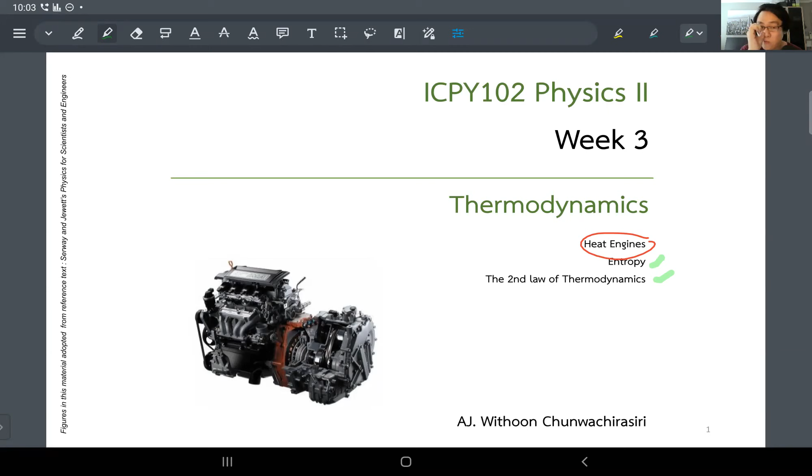So this time we are going to focus on heat engines. One thing you should know is this is pretty much going to wrap up the story, like it's cooling it down. Well, not yet—next time it's going to be cooling down—but this time it's the peak of the thermodynamics material, because we're going to take everything and put it into the story of understanding how a heat engine works. Sounds cool? All right, so this is it.

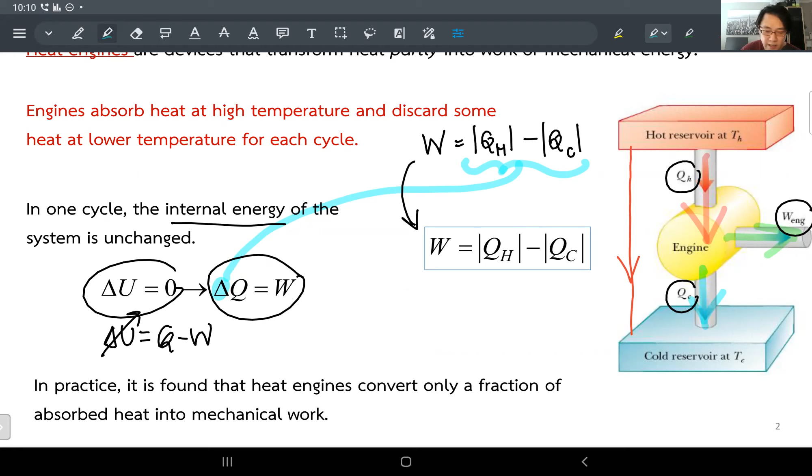So this delta means this difference right here - that's the delta. It means there's a portion of heat that flows in, and you have to take the difference with respect to the heat that is flowing out. So the difference between the heat coming in and going out must be equal to the work done. That's it. It's kind of long, even though this slide looks simple enough, but I hope this gives you the infrastructure of everything we're going to use.

Okay, but this is going to get more complex over time when we attach this whole thing with the real process, like a PV diagram, for example. All right, cool. So how can we express the ability for this machine to turn incoming heat into some useful work?

So we define, I think this is the word you guys agree on, efficiency. So what you want to know is how efficient this engine is running. The better the efficiency, the better it can take heat flowing in and turn it into useful work. And the best possible case, a perfect efficiency, would be a 100% efficient engine, even though we said that's not the case. So what should be the definition of efficiency, guys?

The concept is very simple: what you get divided by what you have to supply or provide to the system. Does that make sense? Think of it like studying physics right now. The efficiency of your learning is how much material you can put into your head, divided by how much material I provide to you. Or you can think in terms of time: you study for 1 hour, how many minutes do you actually concentrate and understand the material. So the concept is simple - what you get over what you have to supply or provide to the system.

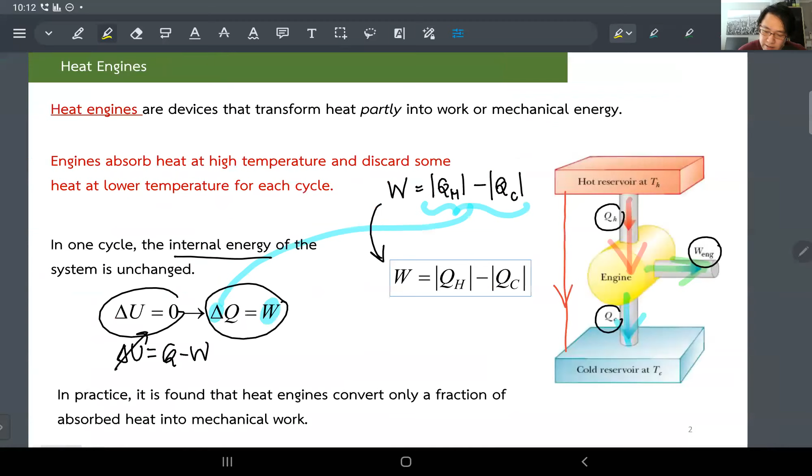Looks good. And what you get, of course, is the work done from this system. And what you have to provide, of course, is Q hot, the incoming heat. So by definition, the efficiency is defined as the work done over Q hot.

And because efficiency is just a number, it's never going to go negative, so that's why there are absolute value signs everywhere - all you care about is the number. And that number is going to go between 0 and 1. 0 means you get nothing out of it, 1 means you get everything out of it. You can multiply this by a percent, so you can go from 0% to 100%, depending on the units you want to work with. But efficiency is just a unitless quantity, no unit - it's just a number.

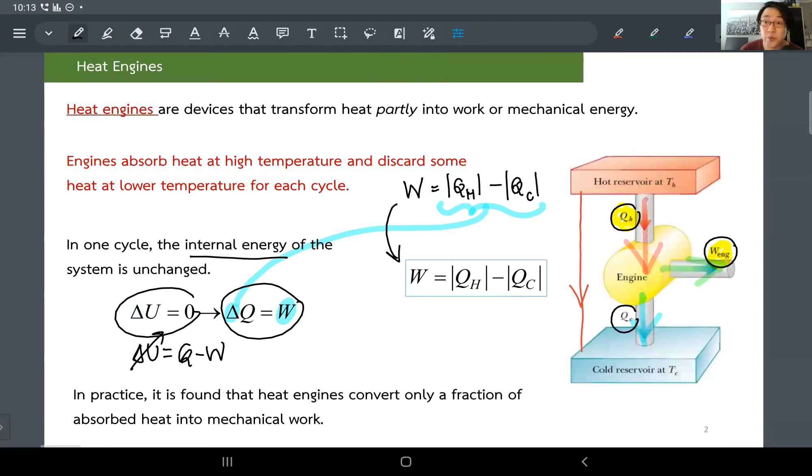Now you can use the expression we saw before - the work done is just the difference between Q hot and Q cold. You can substitute that in and rearrange it if you like. So whichever of these 3 expressions you want to pick as the definition of efficiency. One thing I like about the last expression: the efficiency is 1 minus Q cold over Q hot. We can understand the last portion of this expression intuitively.

If you want the efficiency to go super high, what you need to do is minimize Q cold over Q hot. Make sense? The less heat you discard out in the cold reservoir, the higher the efficiency you're getting. The best case is if this goes to 0, which, again, isn't possible. But anyway, that's what it is - if you don't have anything to throw out at the cold reservoir side of the engine, the better the engine is running, because that means the engine can turn the incoming heat into more work done.

Okay cool guys, so far so good. This is a fun fact, just so you know: the diesel engine - even though diesel engines seem to run more efficiently than a gasoline engine - the efficiency is not going to be more than 40%. Isn't that amazing? That means you throw the energy out, more than half of it. And where does this go? The engine runs hot - when you touch the engine it's super hot. That is the heat that is useless.

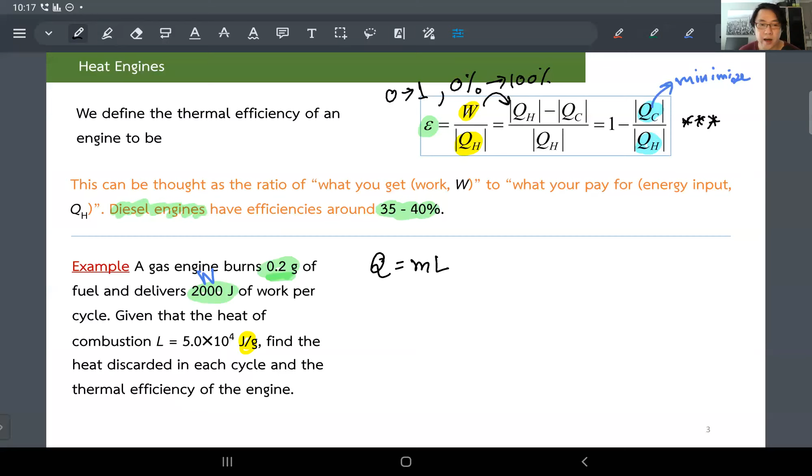Okay, so let's calculate first. Because you burn 0.2 gram, just multiply this by the heat of combustion, so you know how much energy you get from that combustion. So you times 5 times 10 to the fourth joule per gram. Gram units cancel. So at the end you get 10 to the fourth joule. So burning 0.2 gram of fuel gives you 10,000 joules.

Cool, and now let's draw the diagram again. So now you can see that that is your incoming heat. That is actually Q hot right there. You guys with me? Yeah, because that's what you provide to the engine. So that is your Q hot right there, 10,000 joules.

And the problem already gives you information that this engine can turn this incoming heat into 2,000 joules of useful work, turn the wheels or whatever. So now you know right away what should be the discarded heat, guys. Of course, it's going to be 8,000. Yeah, everything has to add up. Okay, and that's it. From here, you know right away that your discarded heat...

Let me just make sure you won't confuse the sign here. Just put the absolute value here, since we already know the direction of heat flow. So what we have over here already answers your first part. The heat discarded is going to be 8,000. And what about the efficiency, guys?

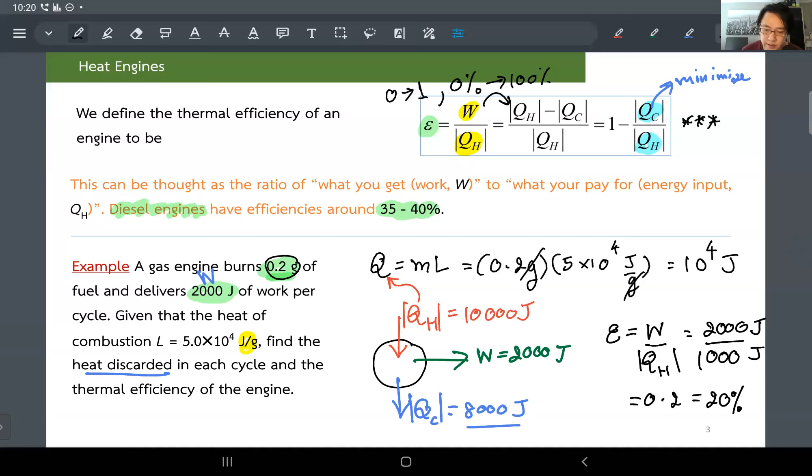Okay, so before we dive into some more quantitative calculations and get you to work on the PV diagram and everything in detail, just like last week, what if, what if some of you are probably wondering, Ajahn, can this be run backward?

Can we go against nature a little bit? Of course you can. If you reverse the direction of all the arrows in the heat engine diagram, you're trying to extract heat from the cold reservoir and dump it into something hotter, which is against nature a little bit. So this isn't going to happen on its own. You cannot transfer heat from cold to hot, that's not the right direction. So the only way to do it, you have to supply that engine with some extra work.

So you have to reverse all of the arrows. All the directions of the flow have to be reversed. That means you have to supply some work, so you'll be able to pump the heat.

The concept of the pump is just like the water pump in fluid dynamics. Every time you want to take water from a lower level to a higher level, you have to pump the water. You need a water pump because water flows from high to low naturally, and anything flows from high to low naturally. So if you want to bring water from low to high, you have to have a pump. If it's water, that's a water pump.

But now we need the heat to flow, so we have a heat pump. The way you do it is you have to supply this pump with some energy, just plug it in, if it's an electronic heat pump, something like that.

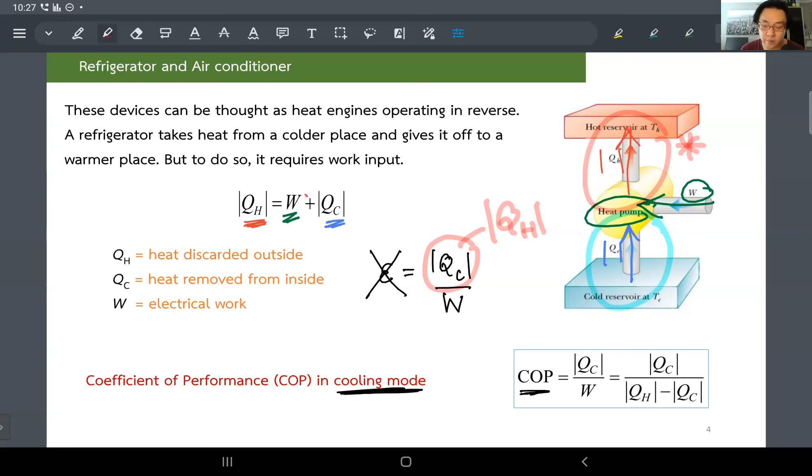All right, so that's done, at least I get this one out. And I hope you now understand air conditioners and refrigerators, with the underlying thermodynamics in your head. Next, all right, here we go. The fun is about to begin here.

So we already saw that the main diagram was simple: heat flows in, some work is done, and the rest goes to the cold reservoir. But what is really happening is there must be some process happening to the substance we use in that engine. And of course, you can guess what we're going to use is an ideal gas, because anything else is too difficult. However, there's something else pretty interesting, and by analyzing this process, this scenario, will eventually lead you to the best engine in the universe. Are you ready for it?

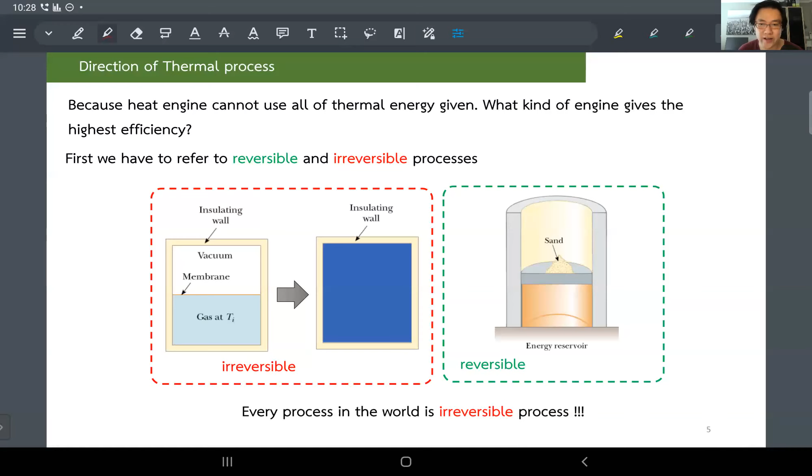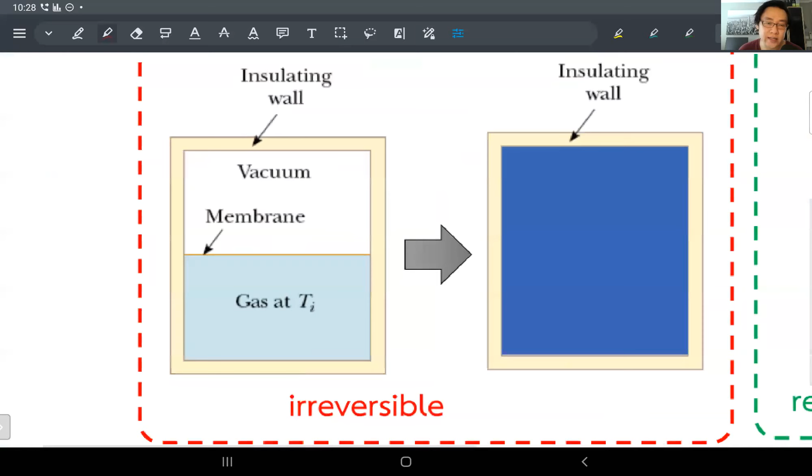No? Okay, all right, so consider this. I think you're familiar with this already, we've done this a couple of times. Take a look at this: you have, once again, a gas in an insulating wall container, so it's insulated, this will not allow any heat to flow in or out. No heat flow for sure. Plus, the gas is confined in the bottom half of the container by some membrane, whatever. Let's say the gas initially has some temperature and has a volume just half of the whole volume of the container. And because this container does not allow expansion or shrinking, that means no work done is going to happen here as well.

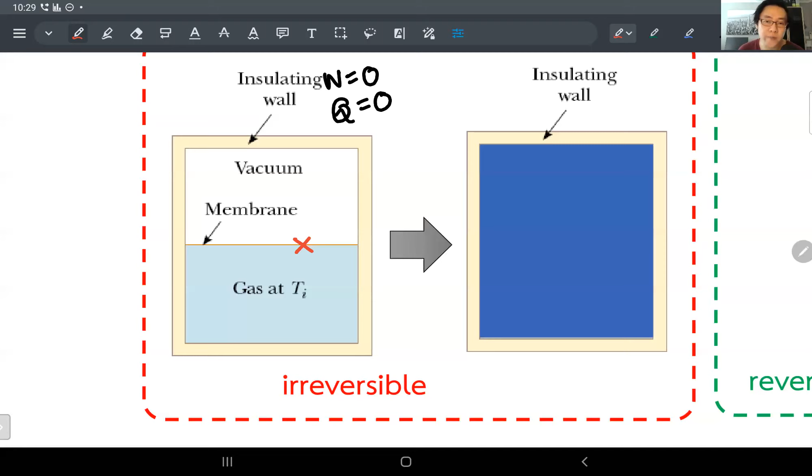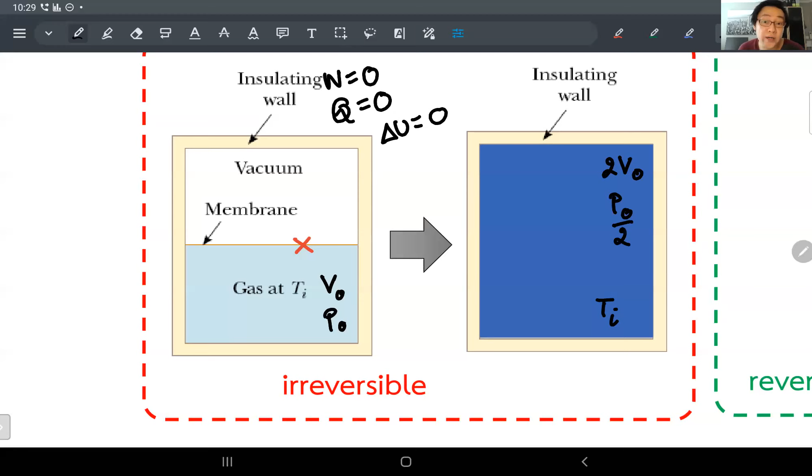Now, once the membrane expires, or whatever, breaks, the gas expands and fills up the whole space inside the container. So what you get at the end is the temperature will not change, because you do not allow heat or work to occur. So delta U will also be 0, all right, you saw this already. However, the volume is twice as big - if you call this V naught, so this is going to be 2 V naught. But from the equation of state, you know that if this is the initial pressure, at the end you're going to get half of the pressure, right? Because PV equals nRT all the time. And this, you already saw from last time, this is an isothermal process because temperature does not change.

Okay, so when the temperature does not change, this is going to be on the same isotherm. All right, that's it, that's what's a review.

But then the point of this one is, this process is irreversible, guys. Everyone knows that because it's pretty much impossible, even though there is some probability that all of the gas molecules just decided to gather around at the bottom half of this volume of the container. But the probability of that happening is so low you'd have to wait longer than the age of the universe for this to happen. So you can safely say that this is an irreversible process, guys.

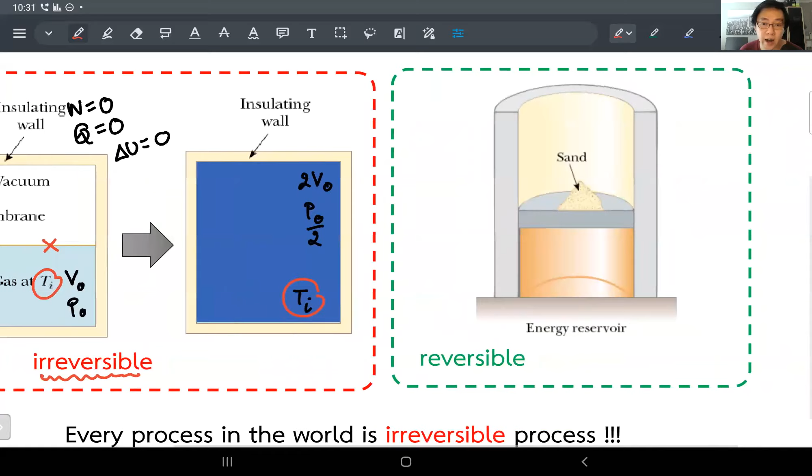So if you want something that is reversible, let's compare this to the scenario on the right. You have the same gas, same volume, same initial pressure, same initial temperature. Now the system is different, your gas is in thermal contact with the energy reservoir, and you saw this example already. If the energy reservoir is already at the same temperature, T sub I, this is going to be another isothermal process as well.

However, on the right, now you have a piston that is movable. So you allow the gas to expand or contract a little bit, depending on interactions with the external force. And then you imagine, all right, this is not a real experiment on anything.

Just imagine this. You have a bunch of sand, and you just pour that grain of sand on top of this piston. You put some weight on top, and of course you can compress the gas down just a bit, and then you just keep pouring a little bit, one grain at a time, as slowly as you want. So you get some compression.

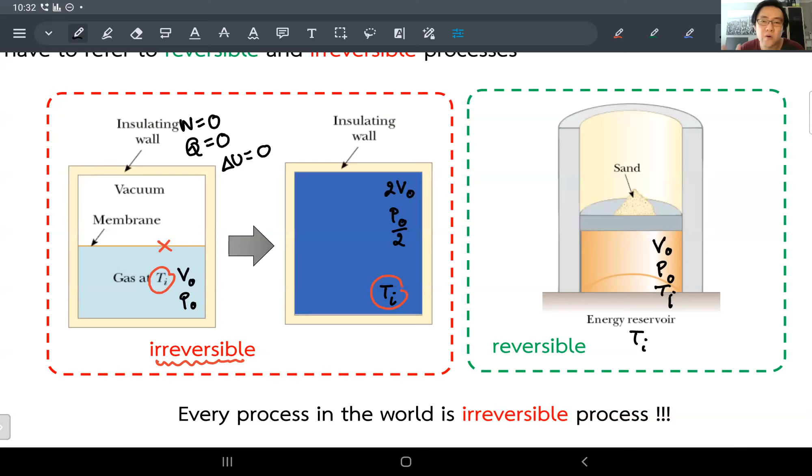But then you can change your mind. You're just like, okay, I wanted to expand back. So you just pick up each grain one by one again, and eventually you allow the gas to expand back to its original position. So from the look of this imaginary scenario, it's just trying to show you that if you do things slowly and try to make things nice and cool and slow, it's still a reversible process.

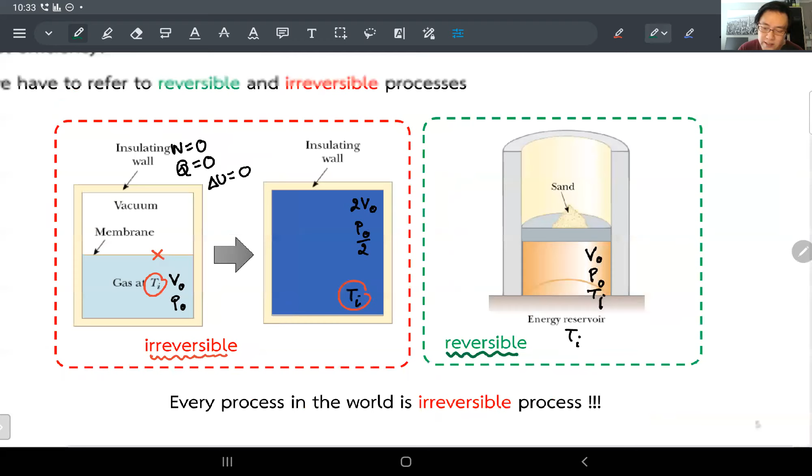And now you can see from here, you have to do things very, very slowly. This is the word you encounter, quasi-static. So you can see the relationship between what this word is trying to tell you. We mentioned this briefly. In thermodynamics, when you do something, you have to do it slowly, let the system adjust itself until everything reaches equilibrium. So you can measure the pressure, measure the temperature, everything nicely, and then move on to the next step. This is the step I'm talking about.

It's the step where you put the grain of sand one at a time, do things slowly. It's kind of a sham a little bit, like in reality nobody will do this, but understanding this kind of imaginary process allows you to understand thermodynamics, and it seems to work fine.

All right, so this is the distinction between the reversible process and irreversible process. Isn't that cool? You're probably like, not cool, John. What's the point?

What's the point? The first point is this: every process in the world, I might even be able to extend it to every process in the universe, but maybe that's too strong of a sentence. So let's just keep it to: in the world, it is irreversible, guys. We'll have a chance to discuss more about this next time when we discuss the second law of thermodynamics. But this is something that you can relate to.

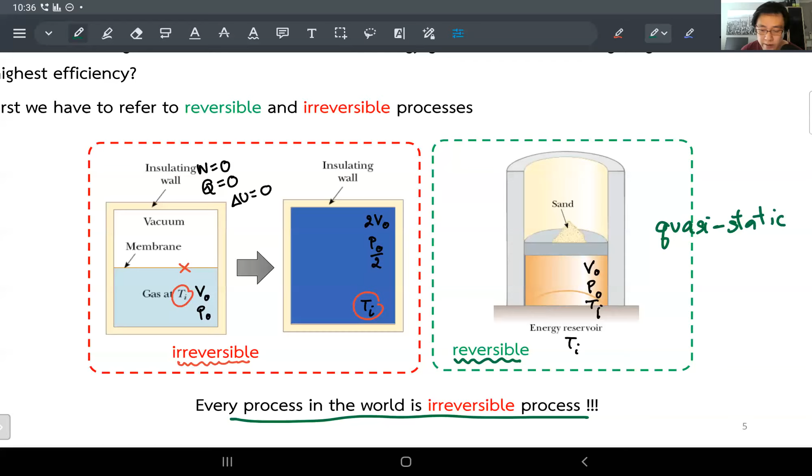So what's the point? Okay, the point is this. Now let's come back to our business in thermodynamics here. So look at the first scenario up top.

When you have a metal box that's hot, 70 degrees Celsius, and inside there's ice at 0 degrees Celsius, it's gonna melt. Eventually the metal box and the ice will come down to some moderate temperature in between, let's say 40 degrees Celsius. And you guys know there must be heat involved in this process. Heat will flow from the metal box into the ice, right?

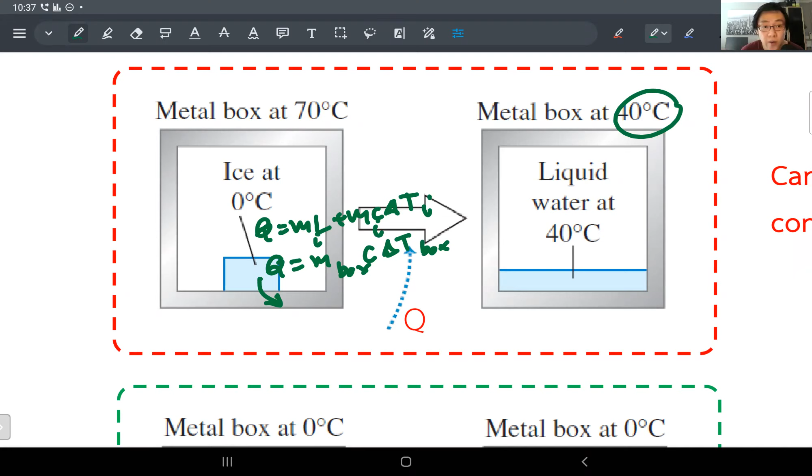And then you did this calculation before: Q equals ML plus MC delta T, blah blah blah. And then for the metal box, Q equals M box C delta T, on and on, something like that for the ice. I don't need to do too much of this. But anyway, the idea is there is some heat flow involved during this process. All right, so I think I can erase this, it doesn't need it.

Okay, so the heat that's involved in this process, you guys know, is irreversible. It's gone. Because the metal box will not heat itself up again, or the liquid water will not get frozen again. So the heat involved in this process is the heat that has been used and gone forever. When I say gone forever, it means there's no chance for this heat to be able to do something useful anymore. Does that make sense to you guys?

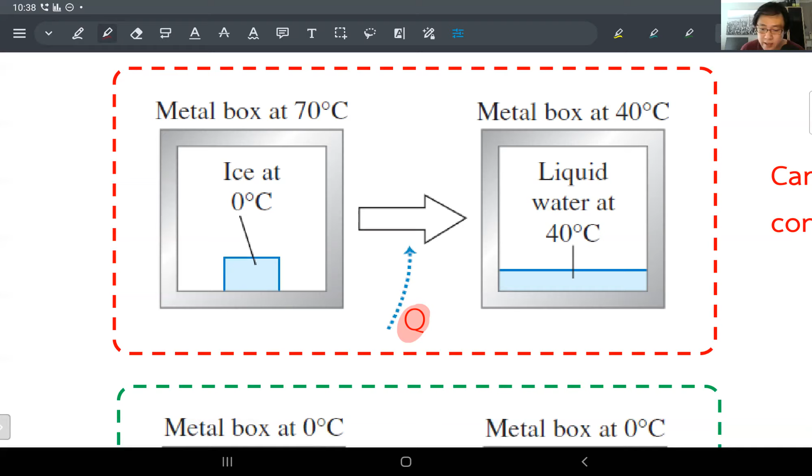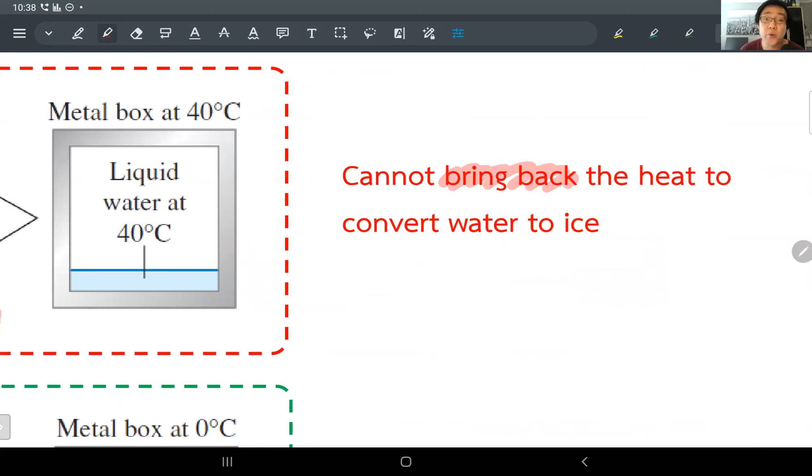Okay, right, so that's why I put the word over here: you cannot bring back this heat. So this heat has no chance of doing something useful to you anymore. All right, now let's contrast this scenario with the bottom one.

Let's say now the box happens to be at 0 degrees Celsius, and the ice is also at the same temperature. From time to time you might not be able to control this, but there might be heat flow from the metal box to the ice, or the ice just decides to change shape a little bit and melt. But the thing is, everything happens at the same temperature, 0 degrees Celsius.

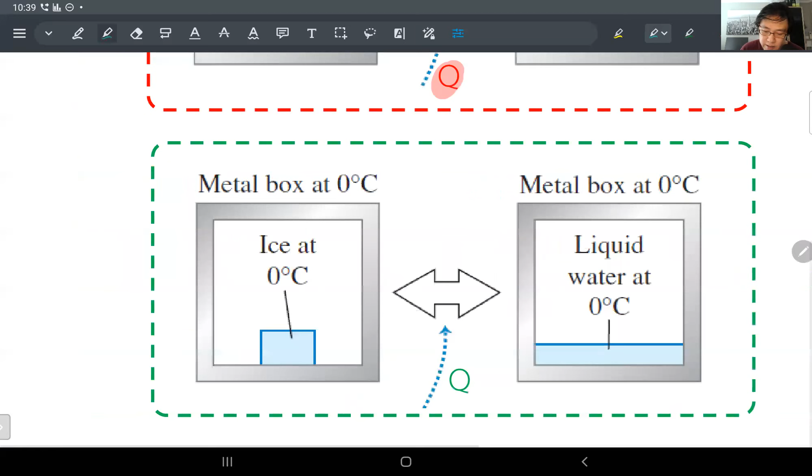So if something happens, like a melting process, you cannot control the microscopic level of this whole thing. There'll be some time that all the molecules decide to arrange a little bit. So it seems like what you're looking at here is the heat involved in this process is not going anywhere just yet.

Oh, there's a question: so when we apply work, does it become reversible? All right, that's a good question. We will have to take a look at how you do that work. But the thing is, when you apply work, the work transfers energy to the system. Does that make sense? Because work is energy transfer.

So that means when you apply work, you already increase the energy of the system. Your attention goes to the system. If you're dealing with a system that is still reversible, then the energy you already put in there is still reversible. Does that make sense to you? So it depends on whether the energy you supply to the system goes into a reversible or irreversible process.

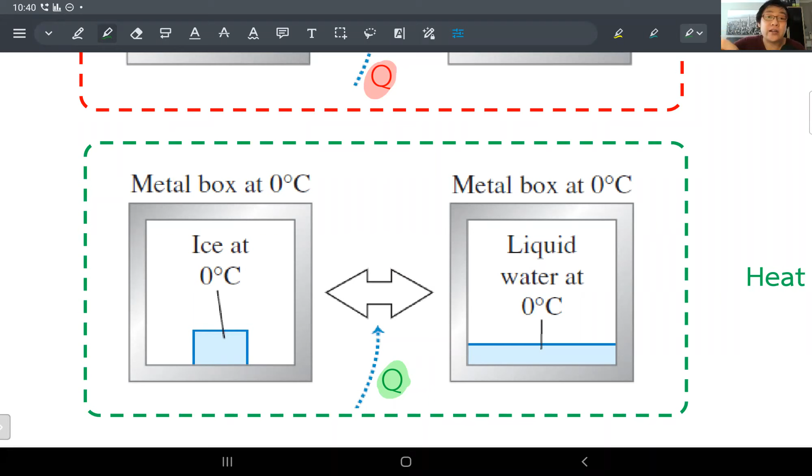All right, so I'd say it has nothing to do with the way that you supply the work. Because when you do the work, you give the system some work, that is the energy transfer, you already complete the transaction. And the rest just depends on the system. That's a good question actually, because I can understand it seems like there are connections there, and you might want to ask beyond the system at some point. But I'll bring you back here: just focus on the system.

So what we have over here is the heat that's involved at constant temperature. You can see that the temperature of the ice and the temperature of the box are at the same temperature. Seems like the heat involved here still flows back and forth. So it's still with us.

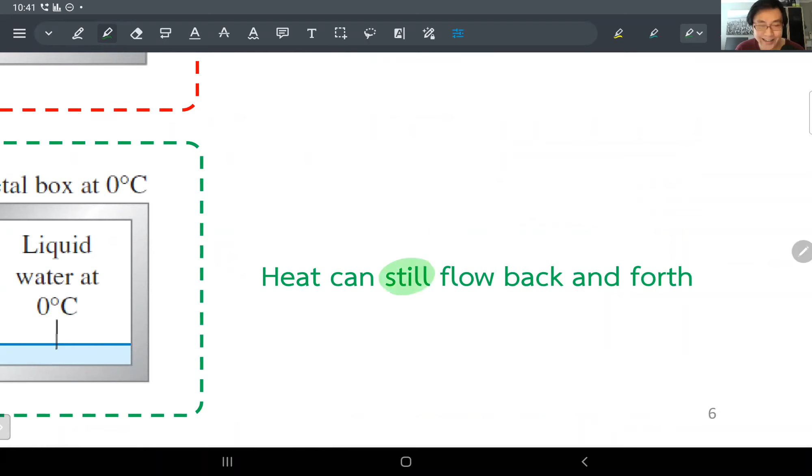Okay, it's not going anywhere. So these are the two contrast scenarios. It seems like the reversibility seems to link to the heat that is available to you or not. Does that make sense to you? Okay, one more time.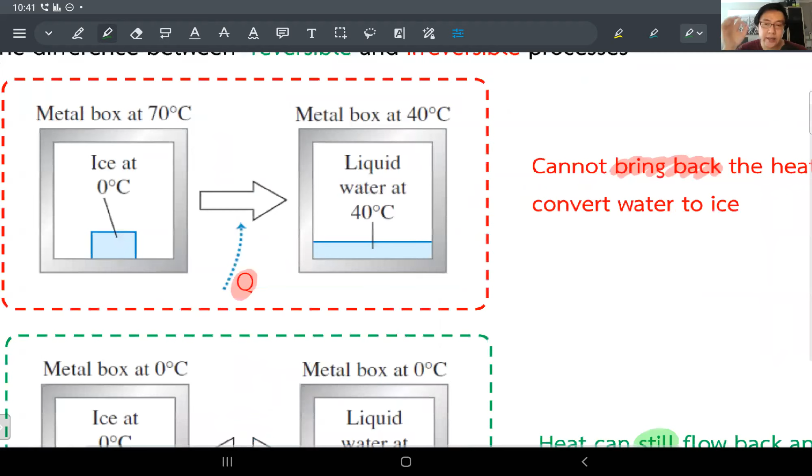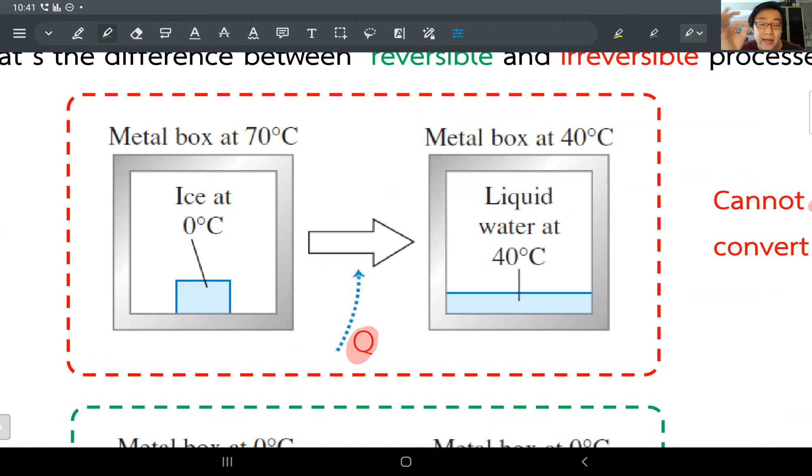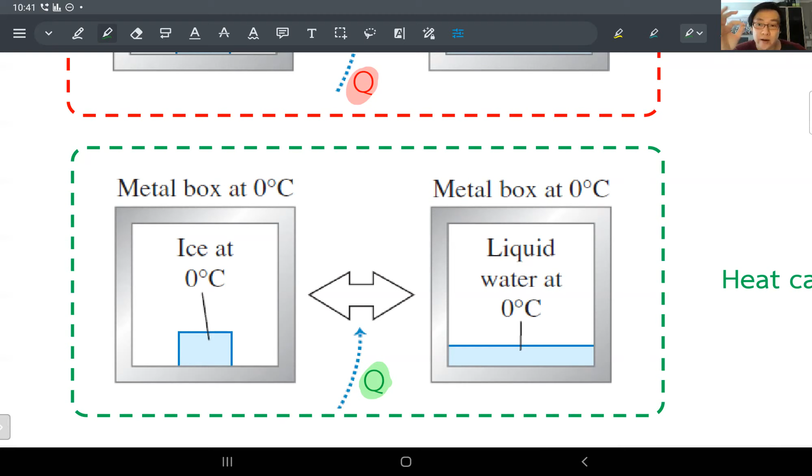It seems like up here is an irreversible process. So when things are irreversible, if you have any heat associated with this process, that heat seems to be a lost one, the one you won't be able to take back and do something useful with. But if you have a reversible process, the heat that you are dealing with during this process is still not going anywhere. It's still running around in your system, and hopefully you will be able to do something useful with it. All right, so that's what we are trying to get to.

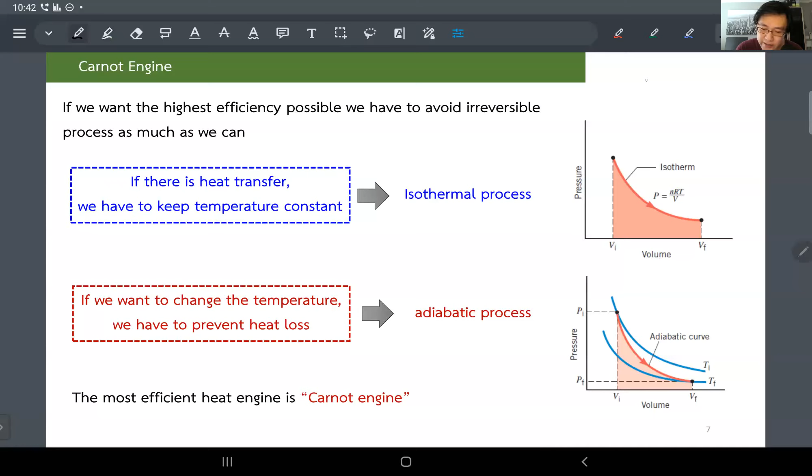So the conclusion is this. Think about it: when you want to generate a very good, efficient engine, what do you want? Of course you want the W. Let me once again draw the diagram for you. There's a Q hot, there's a Q cold dumping out, and there's work done, right? So when you think about it, whenever you want a high efficiency engine, you want to maximize the work done.

Because now we know the work done is just the difference between the Q hot and the Q cold, this is the portion you can imagine as the discarded heat - the more discarded heat, the less efficient. So that means you want the heat involved within the cycle of the engine running to be as useful as possible. Does that make sense? You don't want heat that's useless. I don't want useless heat. I want heat to be within my system, and I hope that I can turn that into something useful.

And that's the conclusion: you cannot avoid running the heat engine between two temperatures. There must be T hot and T cold, because that's a heat engine - it has to run between hot and cold temperature somehow. So you cannot avoid heat. It has to have some heat transfer, but you want to maximize the useful heat, the heat that can still turn into something useful, and minimize the heat that is useless.

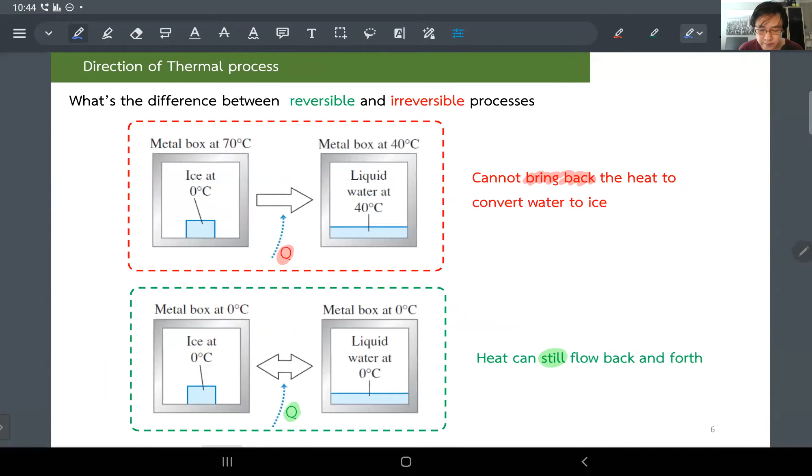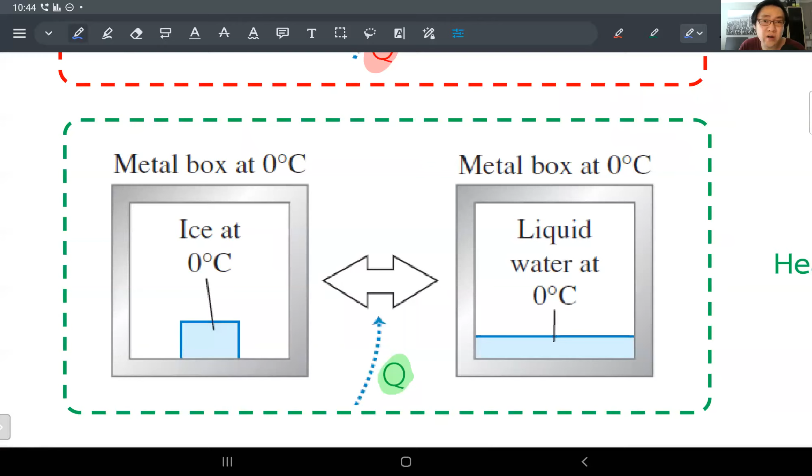So here's the conclusion: if there is a heat transfer, and you will definitely have heat transfer, you want to do it at constant temperature. We already agree this is the bottom case - if there is heat transfer and you do it at constant temperature, the heat is still with us. It's still reversible, not going anywhere. So you want to do that using an isothermal process. Does that make sense?

I think the slide is kind of lagging to you guys. Is that right? I think so. Yeah, I just had this issue for a while, and I think I figured out it's because of the way my new notebook is communicating with the internet, I guess. I think it's the internet lagging. I don't know. All right, but anyway, it's still not too annoying. Still keep going. All right.

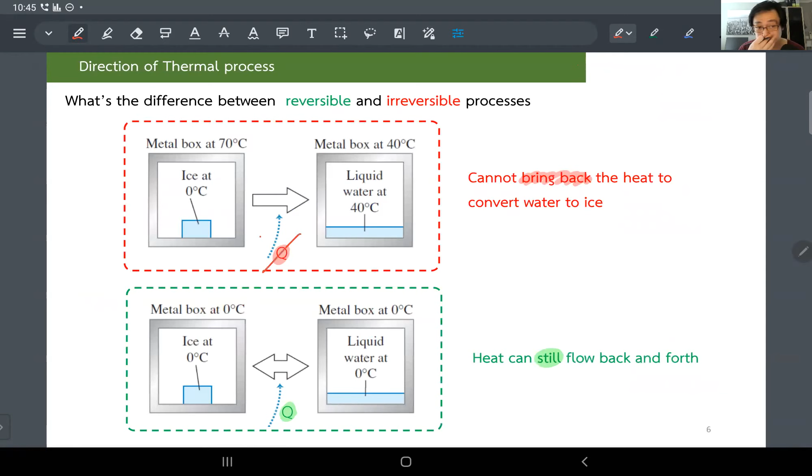Here, on the other hand, that's one part - if you need the heat transfer, please do it at constant temperature, isothermal process. However, you still have to change the temperature, because temperature cannot be fixed at one point. A heat engine has to run between two temperatures. So if the temperature needs to be changed, we don't want this - because you can see there is some change in temperature going on. So what we want is to prevent the heat loss during temperature change, and that is the adiabatic process, right? We saw this before. Perfect.

So we are going to build the engine based on these two processes: isothermal process and adiabatic process. If you can combine these two processes and build a cycle representing an engine, that engine will be named the Carnot engine. Okay.

Carnot is the French engineer who came up with the conclusion that this is going to be the best engine in the universe. Nothing can beat this one. This is the upper limit of the efficiency of an engine in this universe, running between two reservoirs, hot and cold.

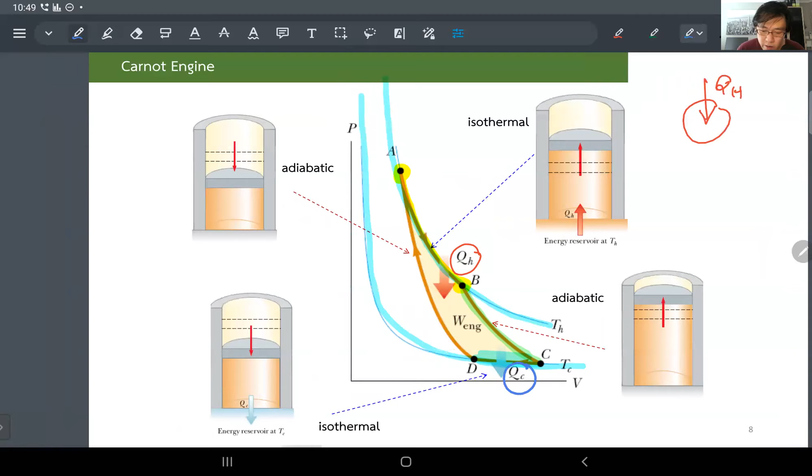Then, of course, you want to shoot everything back to A, because you want to complete the cycle. During that process, you have to dump out the heat, because you cannot just shoot back to A given that you want to do an isothermal process. So you go back a bit so the gas gets compressed, down here from C to D. But during that compression, you have heat flowing out, that is your Q cold. You have a heat exchange, and you want to do it under an isothermal process. Is that cool?

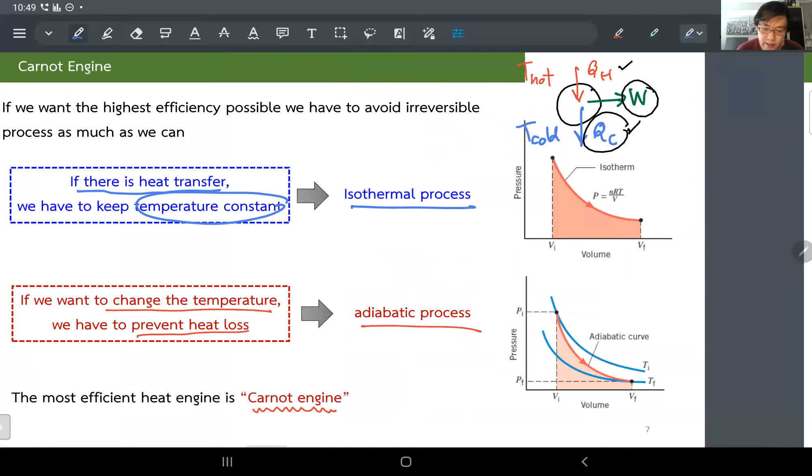Nice, all right. Now, once you are here, it's time to get back to A. Now you're already at point D. You want to shoot back to a higher temperature, so there is a temperature change, and you want to do it adiabatically, so follow the red line here, jump it back up again right there. Okay, and that is another adiabatic process, no heat exchange, and then you go back to point A, complete the cycle. That's it, this is the Carnot engine, guys.

And this will give you the best engine in the universe. After the break, I will show you how to calculate the efficiency out of this.

And we will have a chance to answer why can't you use your temperature body to charge your smartphone? Yeah, that's a reason for it.

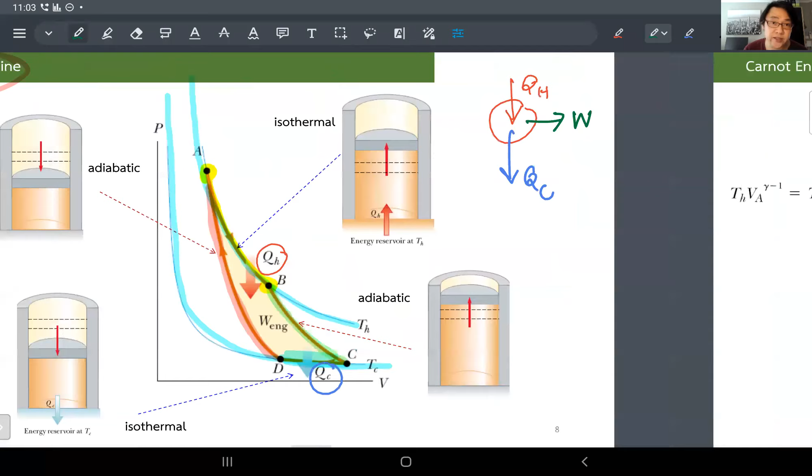So how to calculate the Carnot engine efficiency? Of course the concept stays the same, it's still the efficiency as a ratio between the work and the heat that you provide to the system. You already learned all this stuff since last week. So what you saw over here is, if it's an isothermal process, you have delta U equal to 0, and then you can calculate the area under the curve, and it's nRT log of V final over V initial, and so on.

For the adiabatic process, you already saw that you have to use PV to the gamma equal to a constant, so you can turn that P and V into T and V or whatever you like. That means I can also write the relationship along the adiabatic process using that PV to the gamma equal to constant. So from these four equations, you can mix and match, manipulate this and that, and try to come up with a nice relationship among these parameters. And it turns out, welcome to the conclusion, from all the equations, we get this.

The conclusion for the Carnot engine is simple. It turns out the ratio between the heat that flows out and the heat that flows in is the same as the ratio of the temperatures. So the ratio between Q cold and Q hot is equal to the ratio between T cold and T hot, and you are done.

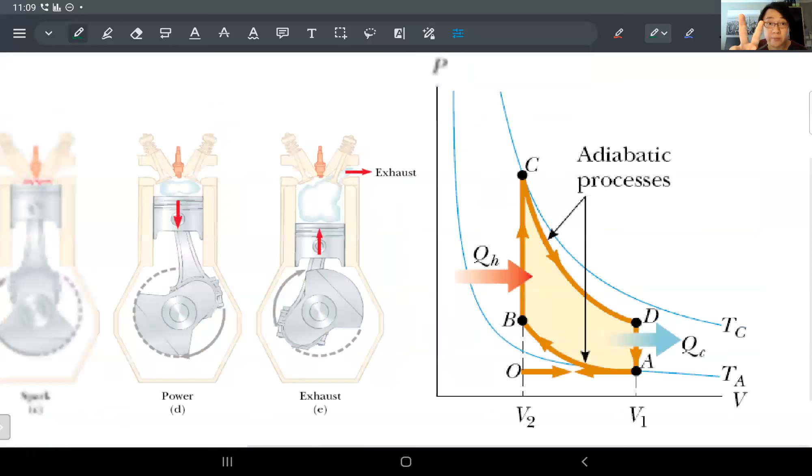Let's say we don't worry too much about the details, but if we model those processes, the cycle of movement in the cylinder of your car engine, as a PV diagram, you can see the shape won't look like the Carnot engine, because the Carnot engine has 2 isothermal and 2 adiabatic processes. Here you might have 2 adiabatics and two constant volume processes.

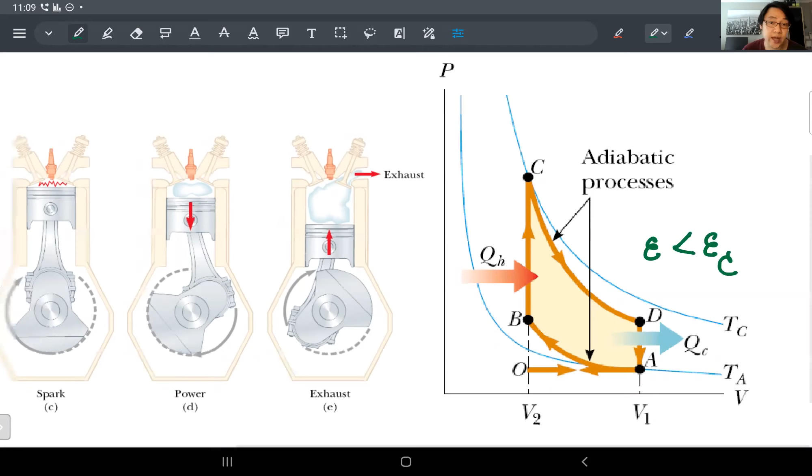So what you can expect is the efficiency of this engine will be less than the efficiency you'd get if you replaced it with the Carnot engine. We will have a chance to calculate the efficiency of this kind of cycle, or other cycles, and then compare it with a Carnot engine. We'll see in the example right here.

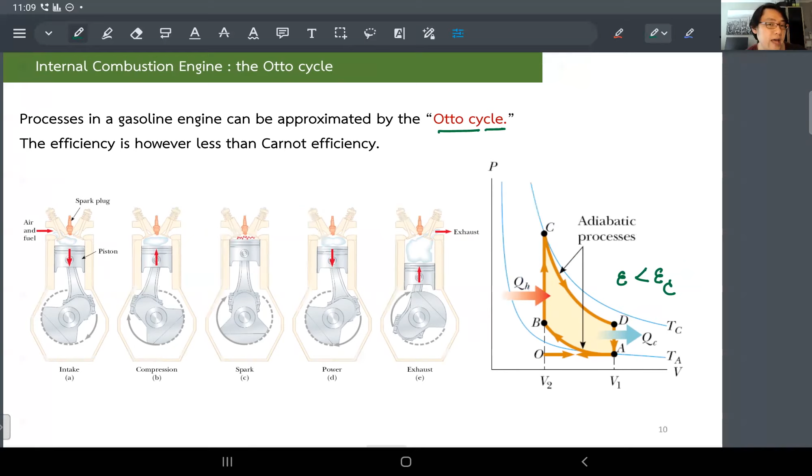All right, before we dive into that, let's do a quick intuitive question first. You have three engines operating between reservoirs separated in temperature by 300K, so it's a fixed amount of temperature difference between hot and cold reservoir. The reservoir temperatures are the following: 1,000 and 700, 800 and 500, 600 and 300.

So, what do you think? Which one will give you the highest efficiency, in theory of course? They want you to rank the engines in order of theoretically possible efficiency. You want theoretical outputs, so you think of the Carnot engine.

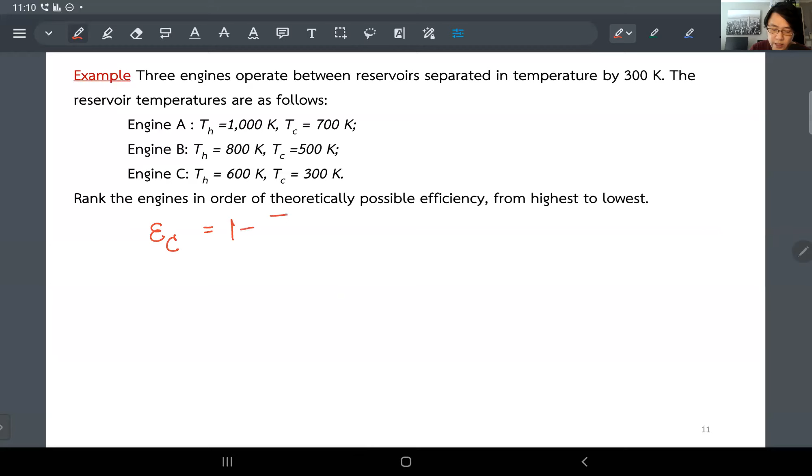All right, let's give it a shot. So the efficiency, I'm going to put the Carnot engine right there because that will be the best you can get: 1 minus, you can turn this ratio between Q cold and Q hot into T cold over T hot. So what I can do here is efficiency of engine A is going to be 1 minus 700 over 1,000, and that will be 0.3 if my math is correct.

You can ignore engine B because it's somewhere in between, so it's going to be competing between either A or C. For the case of engine C, you get 1 minus 300 over 600, and that is 0.5.

Very good. So at least now you can see that engine C is supposed to have a higher efficiency, and that's going to be the number one efficient engine that we're going to pick. The A will be the least efficient engine among the three. But just for you to get an idea, you can do the calculation easily: 0.3, 0.5, that's fine.

But let me give you an extreme condition here. What if my T hot is at 1 million Kelvin? Whoa! All right, so that means the T cold is going to be the difference of 300, so it's going to be 1 million minus 300K. Okay, now I give you another scenario.

So let me call this engine D and let me call this engine E. The T hot is at 300.1 Kelvin, and T cold is at 0.1 Kelvin. I tend to write 300K and 0, but now we already know that 0K is not possible, so let's just add 0.1 to it.

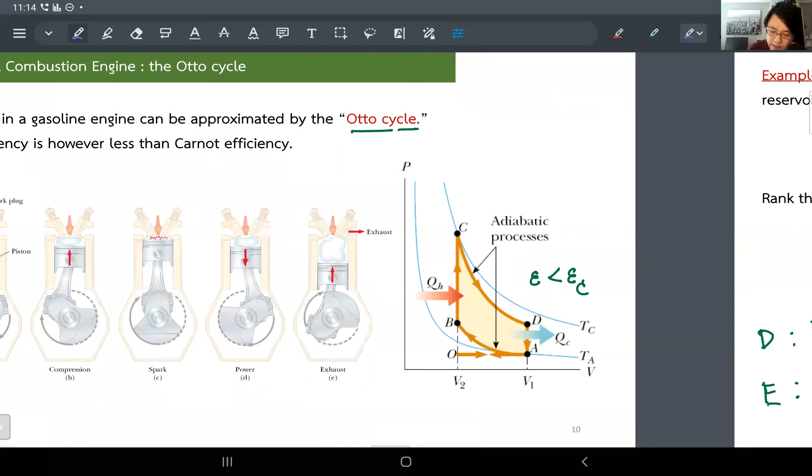That gives you the same conclusion that we saw earlier: the best efficiency engine in the universe will happen if you can manage to have your T cold to be at 0 degrees Kelvin. If you cannot manage that, at least get as close as possible to 0. Any difference from that 0 will be huge to you. Does that make sense?

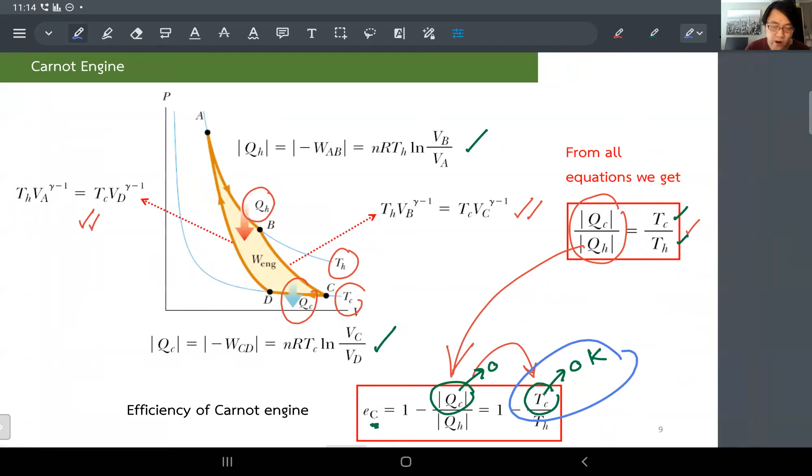And this is the reason why now you can answer my question, my sort of observation, why can't we use our body temperature to charge your smartphone? Because our body temperature could be like, let's say, 37 degrees Celsius, so 310 Kelvin maybe, somewhere around there. And then the room temperature, let's say approximately 300K.

So that means the temperature difference is only 10 Kelvin. If you were to have a Carnot engine and turn it into an interface, like put it in a USB cable setup, the efficiency you're going to get is the Carnot engine efficiency. This is an engine, right? Not the Carnot engine... yeah, what you're going to get is 1 minus 300 over 310.

If you work this one out, the efficiency will be somewhere like a few percent. So let's say just one single digit percentage that you're going to get, maybe 4%. But that is going to be the best case scenario already.

So even if you have a Carnot engine, you only get like 4% efficiency. In real life, you're not going to have the Carnot engine - you're going to have an engine that has friction, has this, has that. And if you have to convert into electricity, you have resistance, loss at the boundary, at the interface, and everything. So you get like a fraction of a percent efficiency. Who will be able to do anything useful out of it? You put in 100, you get out like 0.1. That would be the ugliest energy converter possible right there.

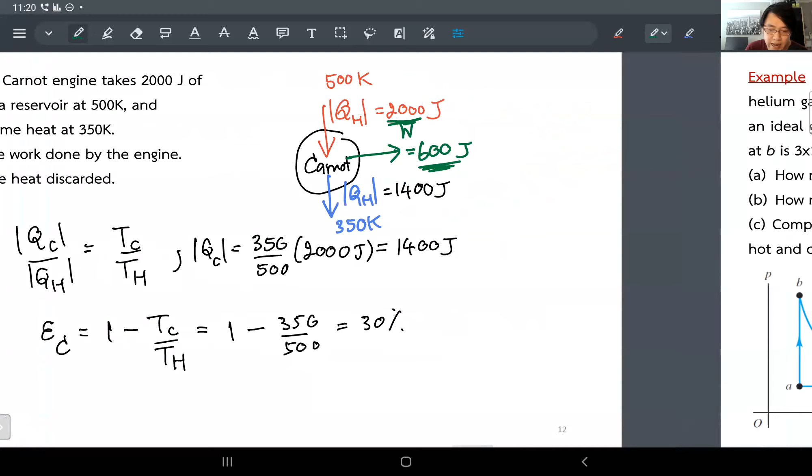All right, this is still sort of like, okay, this is kind of all right, doable. Now, we're going to get more realistic right here. So this is getting closer to the real stuff that we're going to put in, not the final, just keep talking, final exam. In the exam, it's going to have something like this. You're going to get a PV diagram that's showing how the engine works in detail. And then now you start to answer the question about heat, gas, efficiency, everything. And now you see why the first law of thermodynamics that you learned in the past weeks will be very useful right here.

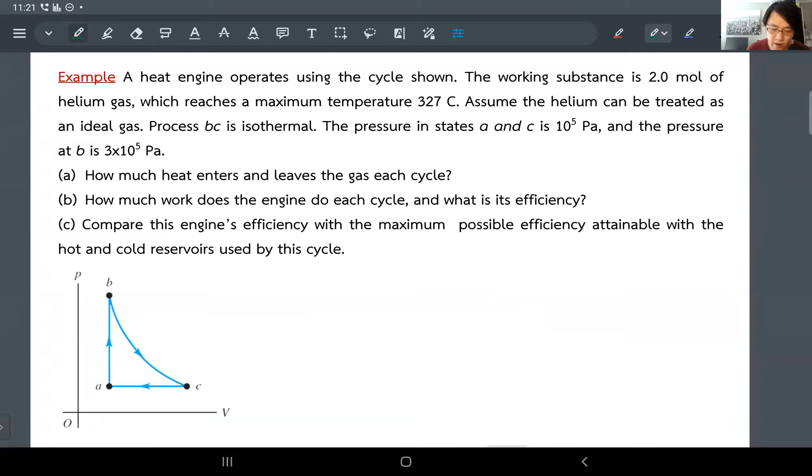All right, let's dive into it, guys. Let's go for it. Oh, I have more space here too. All right, so I'm going to work through this and this is going to be the big example of today's lecture. And we can throw the rest to the next time, so you have some time to think about the material that we study over here, maybe review a little bit if possible.

Let's say if this makes sense to you. You have a heat engine operating using a cycle shown. All right, very good. So from the look, it's still not too bad. It's only 3 segments of process. The working substance is given to be 2 moles of helium gas, which reaches a maximum temperature of 327. All right, so one thing I can do is turn this into Kelvin right away. So you just add 273 to it, and you get 600 Kelvin.

All right, so far so good. Now assume that the helium can be treated as an ideal gas. That's the only way we know how to treat the gas. Anyway, the process BC is isothermal. That's nice. So every time you see a PV diagram, at least imagine that you have an imaginary isothermal curve right there. So the BC line should be right on this isothermal curve. Okay, so the pressure at A and C, which are at the same pressure, are given to be 10 to the 5th Pascal. Very nice. And the pressure at point B is also given. Very good, and it says it's 3 times that of pressure at A.

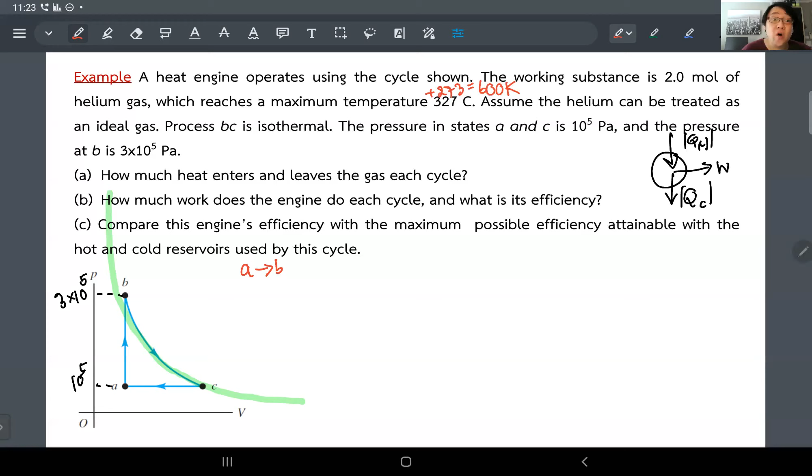Okay, so we're going to attack this one segment at a time. So let's start from A to B, shall we, guys? Okay, so the goal that we want to get to is what is the heat during each segment. And once we have those, then we can classify which is which among Q hot and Q cold. You follow my logic here? Okay, so let's attack what is going on between A and B, guys.

It's a constant volume process. Go for it. Work done is 0. First law of thermodynamics reads delta U equal to Q. W disappears already, and you guys remember U is 3/2 NR T. So delta U is going to be 3/2 NR delta T. So far so good. And you even remember, okay, I recognize vaguely that if you are looking at a constant volume process, that is like N C sub V delta T, right? Remember, there is a relationship between this C V and this 3/2 R right there. Cool. All right, so this is a very good review of what we did before.

So from here, you will be able to just keep going and say, okay, it's going to be 3/2, N is given to be 2 moles, so that is your N right there, R, I'll just leave it as R. Now you're going from A to B, so what I want here is T final minus T initial. Yes, and because they already said the temperature at the hot reservoir is 600 K, the only thing left for you is, can you figure out the temperature at A? Can you? All right, let me once again, A is going to be on another isotherm somewhere like that.

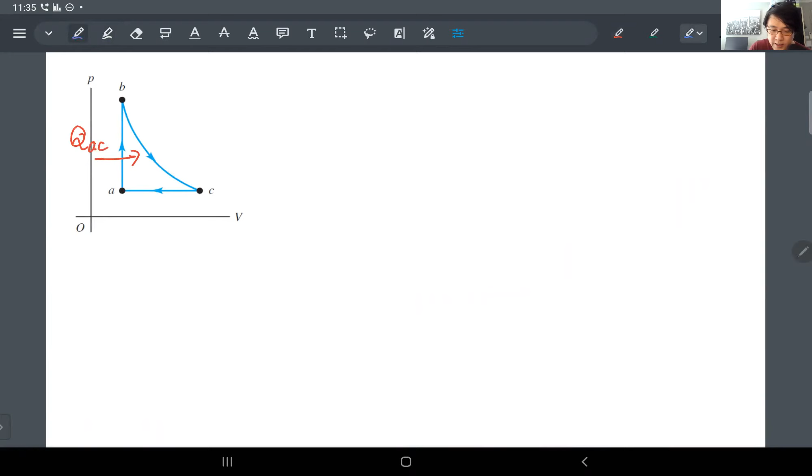Yeah, because what you can see over here is now you know all about the heat. So okay, come back here. Let me draw it nicely over here. I just prepared this space to clear things out. I know it's gonna look very messy here, so I hope this helps. Here we go, so there's a heat flow in, two ins, and one out.

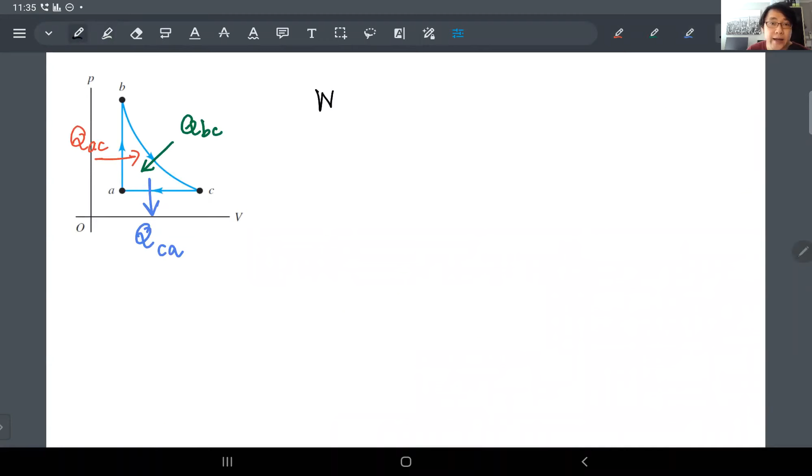So what should be the work done, guys? Well done. By conservation of energy, it's going to be the QAC along with the QBC, those are the two that come in. And all you have to do is just subtract out the heat that is flowing out, QCA, and that will be your W. You guys with me now?

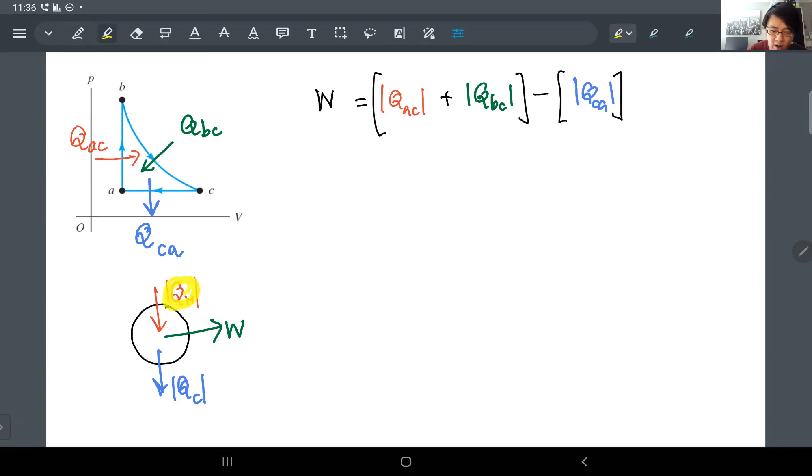Okay, let me compare this to the main diagram that we're going to have all the time: heat Q hot, Q cold, and the work done. So the difference is just now you have to know that at this point, the Q hot that we are talking about here is going to be the combination of the QAC and QBC. So these two will contribute to the Q hot because these two are the heat flowing into the system. Good thing is because you have only one segment that gives you the Q that is transferring out, so that is still fine. The Q cold is still just the QCA right there.

With that, you should be able to guess right away. So what does it mean to take the difference between Q in and Q out? You're definitely going to get the W, but this W has to correspond to the definition we understood all along. It's just the area enclosed by this cycle. And because this cycle runs in the clockwise direction, you're going to get everything as a positive number, because Q_AC is 1200R.

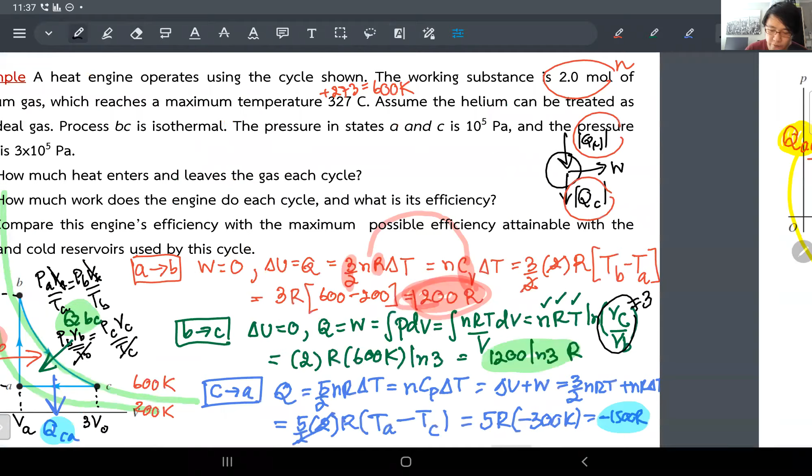Let me erase that for now. So 1200R plus Q_BC, that is just 1200 log 3R, and then subtract out the Q cold, 1500R. If you work out this number, you're going to get a positive number, as expected, because whatever area you get from here, the work done is going to be positive since your cycle is clockwise. The area under the curve from B to C, minus the area under the curve underneath - remember that, you can go back and review that part. At the end, what you're getting is just the area enclosed by this cycle, and it's positive, so you get something out of this cycle.

Everyone okay? All right. And what is the efficiency of this cycle?

But now it's easy, you have all the information flooded in. You can pick any numbers you've already found and plug them into the definition. You can start from W over Q hot if you want. Don't forget Q hot is supposed to be these two segments - that's your Q hot right there. That's the only part where many of you will make mistakes, assuming Q hot comes from just a single segment in the PV diagram. Not necessarily - it depends on the shape of the cycle you're looking at on the PV diagram. If more than one segment draws in heat, you take those to be your Q hot, because that's the heat flowing into your system.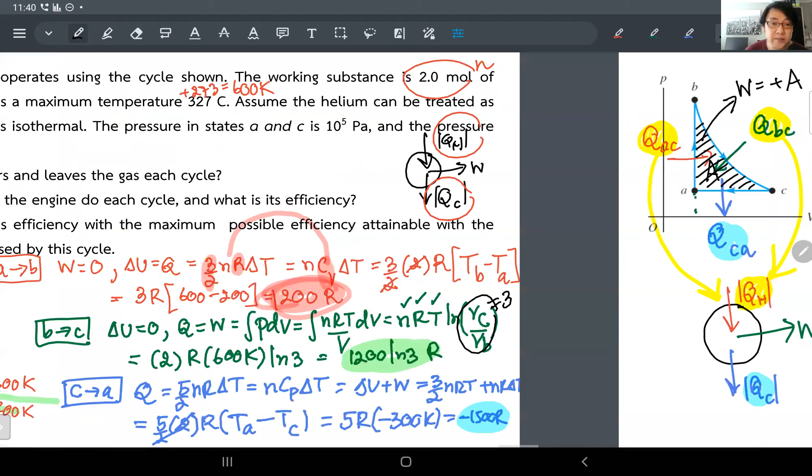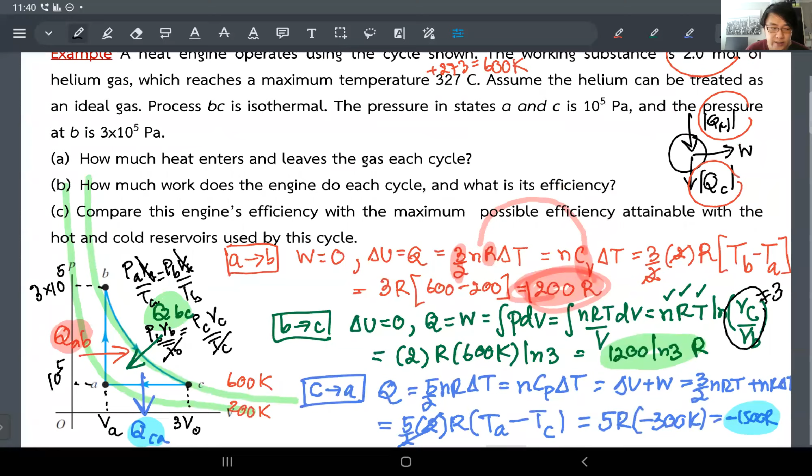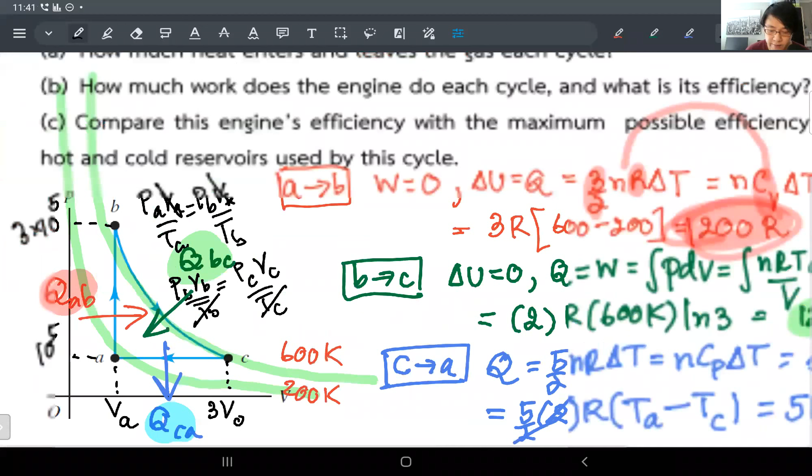Last one - I'll put this as part B, and part C: compare this engine's efficiency with the maximum possible efficiency attainable with the hot and cold reservoirs used by this cycle. What this problem is saying is, what if I were to use a Carnot engine instead of this cycle? What efficiency will I get between these two reservoirs? The reservoirs you're running between are 200K and 600K, so this makes it very simple. The efficiency we're talking about is the Carnot efficiency, 1 minus T cold over T hot, which is 1 minus 200K over 600K, and that is 2/3.

If you really punch it into the calculator, or do the full calculation, this is going to be bigger - 2/3 is going to be bigger than the efficiency you calculated in part B, for sure, all the time.

Is it fun? I know it's a lot, and I don't like it either. Just like I mentioned before, thermodynamics is the one I at first hated so much because there are too many components, and it feels just like biology where you have to memorize a lot. But it turns out once you dive into the details, actually it's just like other physics topics - you only have a few principles you have to hang on to, and the rest you just apply those.

All right, I agree that for this particular thermodynamics topic, there's so many expressions that you have to memorize a little bit, sort of. But I mean, in the end, if you focus yourself within the first law of thermodynamics, it's the conservation of energy. And we are done.

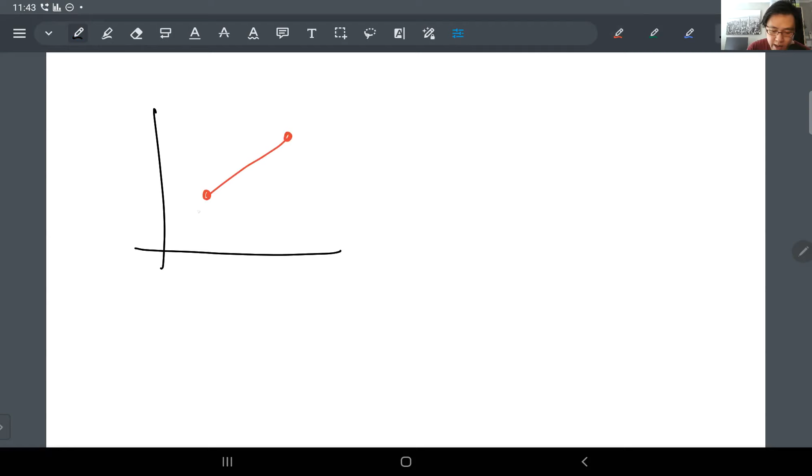So if your PV diagram is showing a line that is straight, linear, like that. Let me call this once again your A and B. So this is your question, right? You have just a straight line linear process like this. What kind of thermodynamic process is this? It just has no specific name. That's fine, it's just a process.

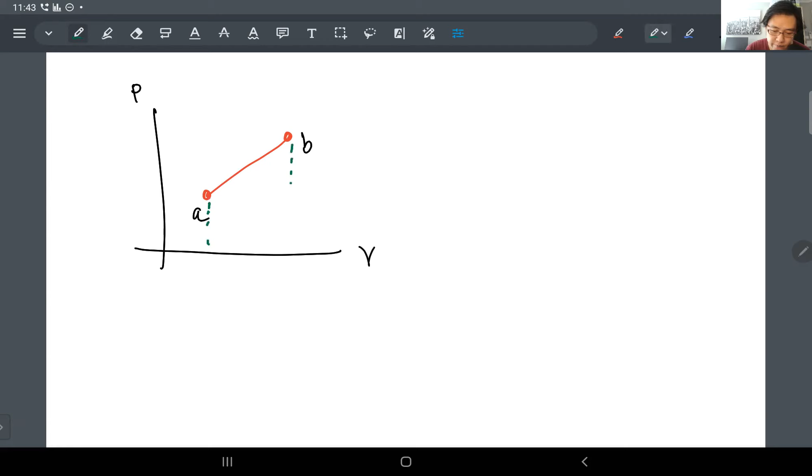To calculate heat and work, you follow the same logic. Attack the easiest one first, which is W, the area under the curve. There's your W. So that's exactly what it's supposed to be, it's an integral P dV. But even with this one, you don't need any integral because it's just going to be the trapezoid. So it's 1/2 the height times the sum of the two sides, S1, S2, or whatever formula you used to use. Just find the area under the curve.

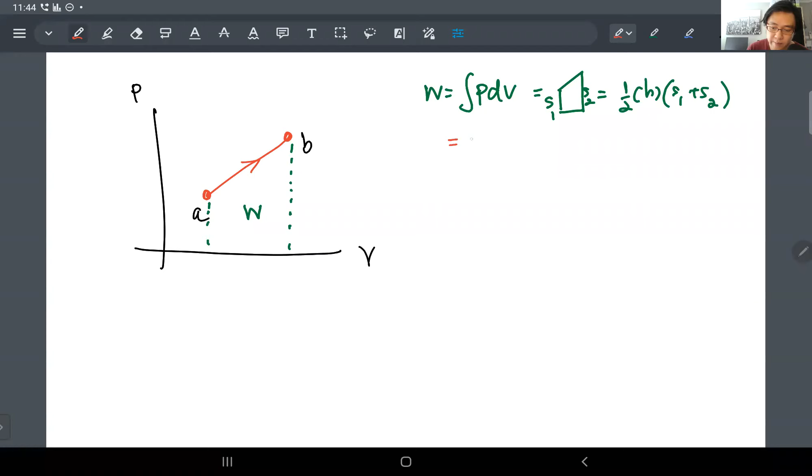If the process is going in this direction, meaning you are increasing the volume, it's guaranteed that whatever you get is going to be a positive number. Let's call this area A, so it won't get confused with the sign. So the work done from A to B is going to be plus A.

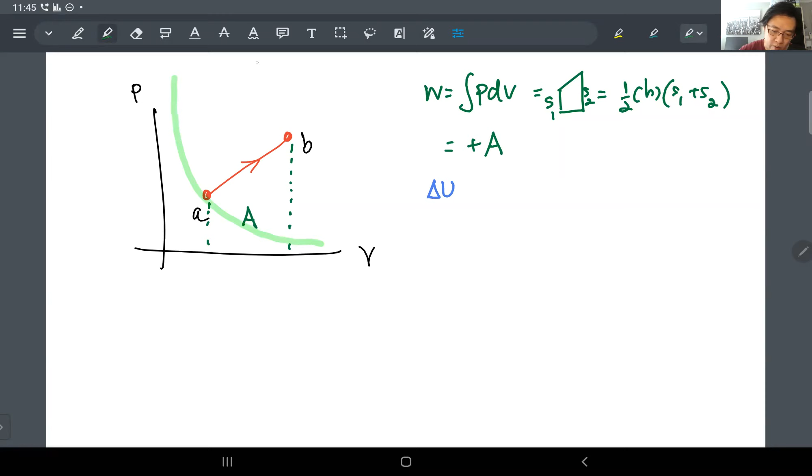Second, attack the next easy one, the change in internal energy. Once again, every point on the PV diagram must be lying on an isotherm, so point A and point B must be on some isotherm. That means you must at least know what temperature you're looking at, and this will give you a T hot and T cold. Once you know the temperature at point A and point B, it's always going to be 3/2 nRT final minus T initial. Sometimes you'll be able to figure this out through PV equals nRT, depending on the information in the problem.

So as you can see, two steps, W and delta U don't change. It's just the shape of the curve that's different, but the way you calculate these two terms is exactly the same. Once you have that, the Q will follow, because from the first law of thermodynamics, delta U plus W gives you back Q. But you already know those two. All you have to do is plug this thing in here, plug that thing in there, and you'll be able to calculate it. That will be your answer for the 3 components in the first law of thermodynamics.

Cool? All right, let's give it a shot. Go back to that problem one more time in the homework, follow these steps, and see if you can crack this one out.